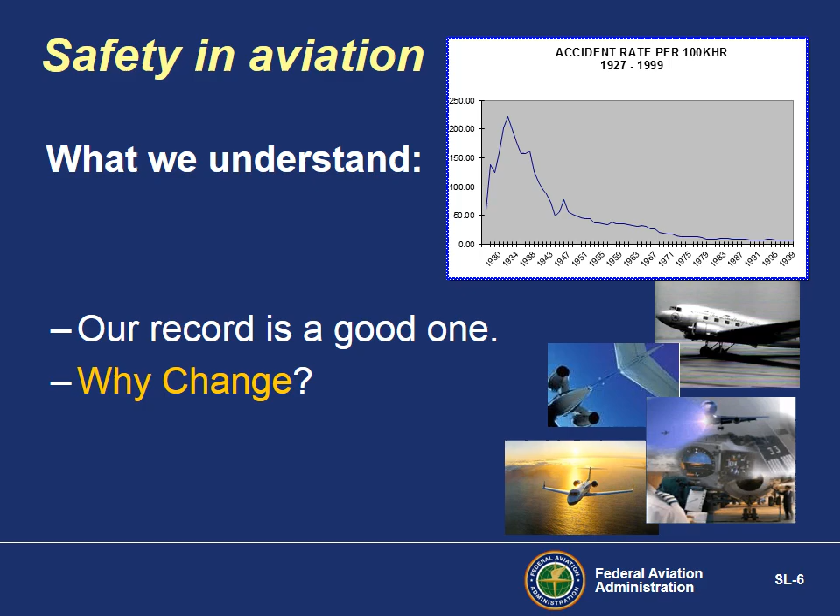This concept was presented to the FAA's managers meeting in August 2009 by Malcolm Sparrow, professor of public management, Harvard Kennedy School of Government, and a frequently quoted expert in risk management.

Inspectors in the aviation industry's safety focus has been driven by the question: is it legal or is it illegal? This is regulation-based thinking. But simply looking to enforce minimum regulations does not answer the question, does it cause harm? This change in focus is the basis of SMS thinking.

Another thing to point out is that regulations are made for everybody and for hazards that affect everybody. But there are harms that may be significant for one or a small number of operators, but not for all. SMS fills in the gaps through a safety risk management process.

Now let's look at ICAO's definition of a safety management system. ICAO defines SMS as a systematic approach to managing safety. This refers to looking at systems and managing those systems. In other words, we don't want to look at just the pilot.

We also want to look at pilot training, pilot checking, pilot manuals, chief pilots, operations managers, fleet managers, the entire system that supports the pilot. This same principle is then applied to all sectors of the service provider's operations.

In summary, SMS is the application of business management practices to the management of safety.

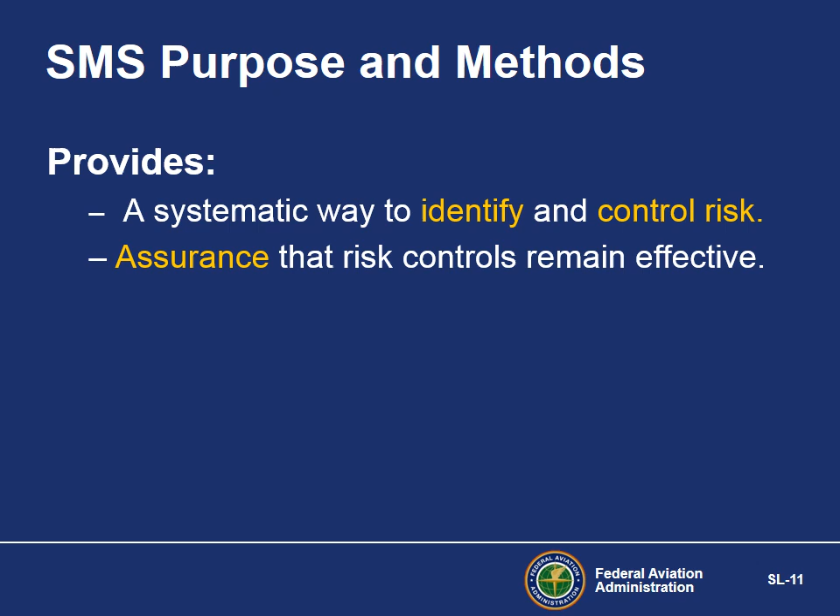We have a definition of SMS, but what does SMS do for us? SMS is a system-based approach that has as its core objective to identify and control risk. It allows us to have greater confidence, assurance that risk is under control. The service provider institutes the controls, and the oversight authority verifies the controls are effective.

It provides a uniform, formal method to comply with the rules, and it provides a method to evaluate an organization's safety management capability. As pointed out earlier with Dr. Sparrow's diagram, the SMS also helps control the effects of hazards that are beyond current regulations.

System safety concepts have not changed, but have been incorporated into SMS. The first bullet shows a general description of system safety from which our oversight processes have evolved. The second bullet is traditionally where system safety efforts have been focused.

An example of technical application might be the review and approval of a certificate holder's RVSM. Three inspector technical specialties are required to be involved in that approval process. Systems thinking would additionally consider the interfaces between the technical experts, as well as the interfaces between the organization's procedures, manuals, workforce, etc.

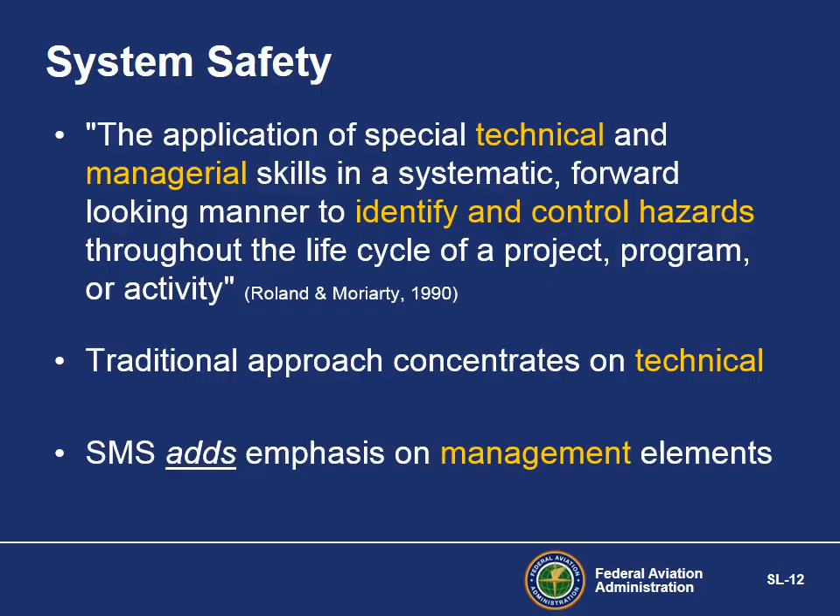ICAO is a United Nations organization that issues international standards related to civil aviation. The FAA is not pursuing SMS because of the ICAO standards. The FAA is moving toward SMS because it is the right thing to do.

Now, there was a lot of energy around the deadline for member states to be compliant with Annex 6 and what that means for the U.S. aviation industry. It's important to remember that the ICAO requirement applies to member states, not individual service providers.

This is an extract of the key text. Notice the golden words. There are two requirements for the FAA in the ICAO standard. First, we need to develop an SMS rule. Second, we need a method to evaluate a service provider's SMS.

The U.S. has filed a difference with ICAO. It's not an exemption or a get-out-of-jail-free card. It merely states that we do not comply with the ICAO standard now, but we intend to.

Each ICAO member state must decide individually whether to allow us into their airspace while we are in non-compliance. Currently, the FAA has no procedure to approve or accept a service provider's SMS. That will come along with the issuance of a rule.

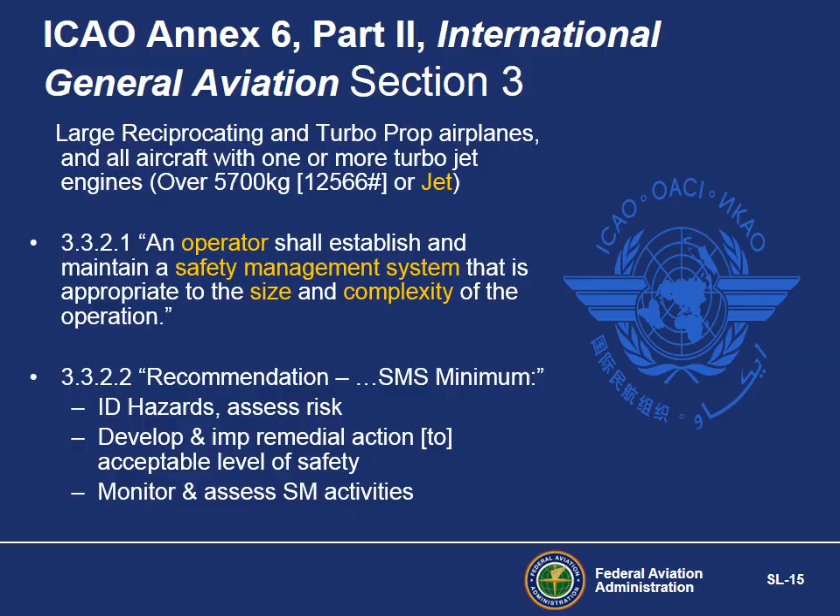Now let's look at the big picture view of SMS as it pertains to ICAO and the FAA. We've been talking about ICAO's Annex 6, which is the ICAO standard requiring a state safety program and service providers' safety management system. So now that we know what is required, we turn to ICAO Document 9859, the Safety Management Manual, which contains the procedures for implementing a state program and the service provider's safety management system.

Within aviation safety, there are two forms of SMS. The first SMS, which is our state safety program, is for our own AVS lines of business. This applies SMS to the FAA's own internal processes and is known as the AVS SMS or the internal SMS.

There are several lines of business, for example, flight standards, AIR, aeromedical, ATO, etc. Each line of business will be implementing the AVS SMS in their own area of responsibility. Two orders provide the policies and procedures for the AVS SMS.

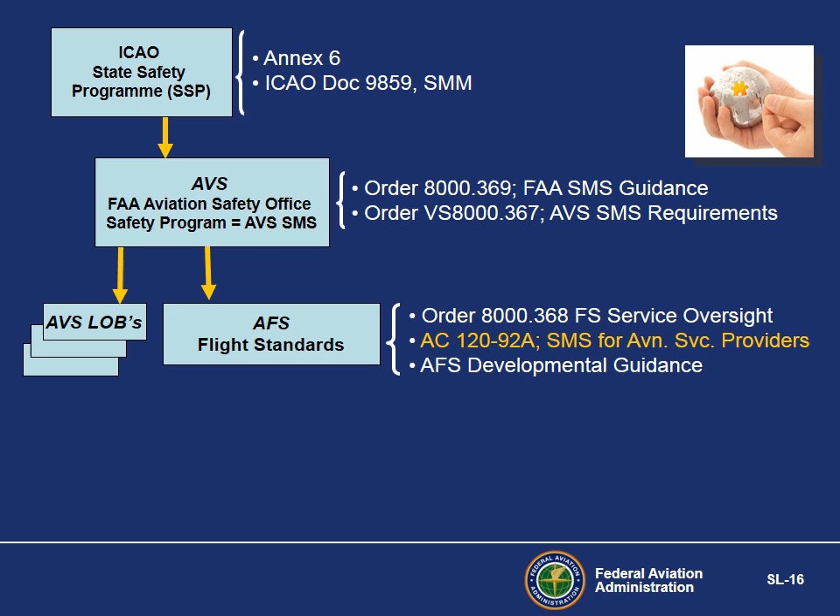The second SMS, the right-hand arrow, is the one we apply to our service providers in the form of an SMS rule and is called the external SMS. It is part of flight standards and is managed by the SMS Program Office, AFS 900. There's an order, advisory circular, and other developmental guidance available that we'll talk about more later.

Finally, there is the service provider's SMS. The service provider's SMS manages their own risks and monitors their own risk controls.

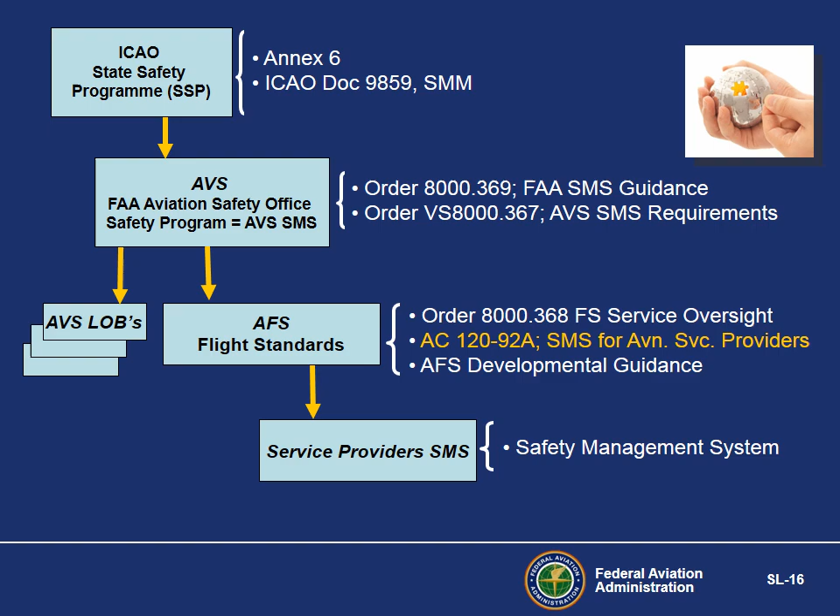Let's examine the roles, responsibilities, and relationships between the FAA and our service providers. Each service provider has operational processes that are used to provide services to their customers. The FAA has oversight processes that we use to accomplish oversight. Currently, we use the NPG and ATOS. In the future, we will use the Safety Assurance System, SAS, which will include our own internal SMS processes.

Traditionally, the FAA accomplished oversight by way of numerous direct inspections of the service provider's operational processes. In short, we have provided the service provider with safety assurance, or we're more like quality control of their operational processes, not really an oversight job. With an SMS, the service provider or operator will increase their role and responsibility for safety assurance by managing their own risk and monitoring their own risk controls through their own SMS.

So what happens to our traditional oversight? Under SMS, the FAA provides oversight of the operator's SMS to assure ourselves and the traveling public that the operators are managing their own risk and monitoring their own controls. We will still do direct inspections of the operational processes. Remember the trust but verify axiom, just not as much as under traditional methods.

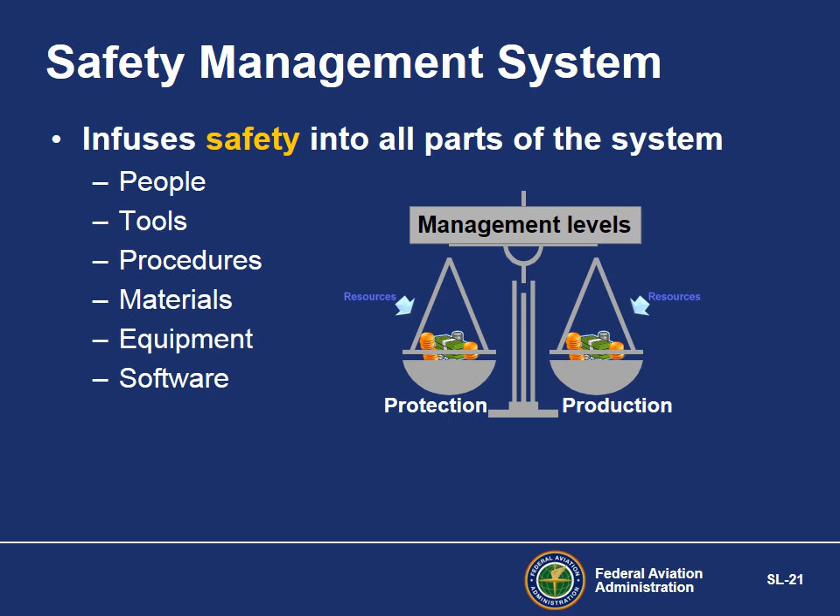Safety issues are the byproduct of activities related to production and service delivery. They are always there. An analysis of an organization's resources and goals allows for a balanced and realistic allocation of resources between protection and production goals, which supports the needs of the organization.

The normal course of delivering production creates safety issues that need to be managed. An organization's leadership must balance production and protection with the same skill as they balance credits and debits and employee staffing.

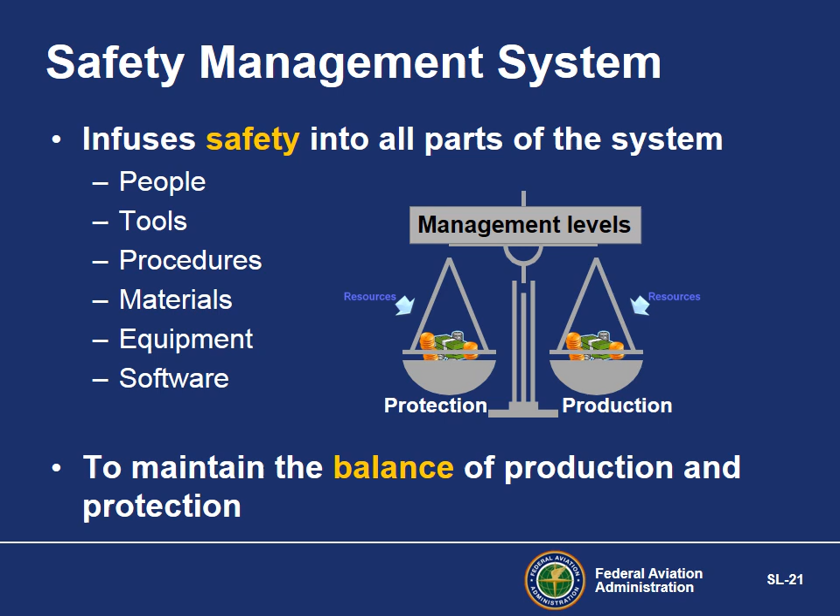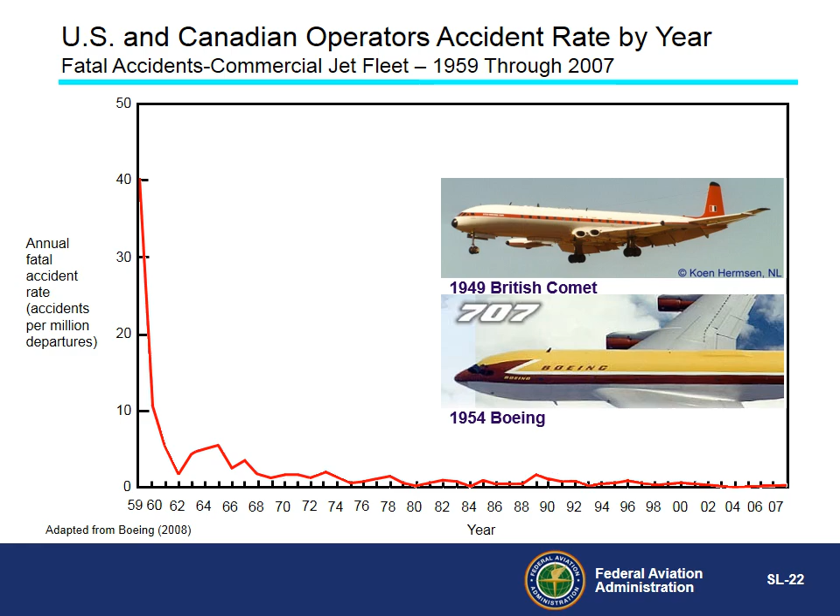Over the last 50 years, there have been paradigm shifts in the evolution of safety thinking, and the accident rate has steadily improved as a result.

The first shift was technical factors. In the 1950s, accident investigations focused primarily on equipment failures. As aviation technology improved, better, more reliable equipment reduced the number of equipment-related accidents. Think of how much better our jet engines, avionics, and navigation aids have become.

With further technological advances, aircraft systems became more reliable and pilots took on a system monitoring role. The downside was, as aviation became more technologically complex, the opportunity for humans to make a mistake increased.

Shift number two involved human factors. At the same time that their complexity was increasing, new systems were becoming more reliable and fault-tolerant and included warnings and annunciators. As a result, the focus of accident causation shifted from mechanical equipment failures to human factors. As this period progressed, there was a greater realization and emphasis placed on reducing and controlling human error.

The current paradigm shift focuses on organizational factors. Over time, through observation and the study of human factors, some in the aviation community began to consider whether there were underlying factors that put pilots and other aviation personnel at risk for making errors. The chief focus became how well does the organization support the employee?

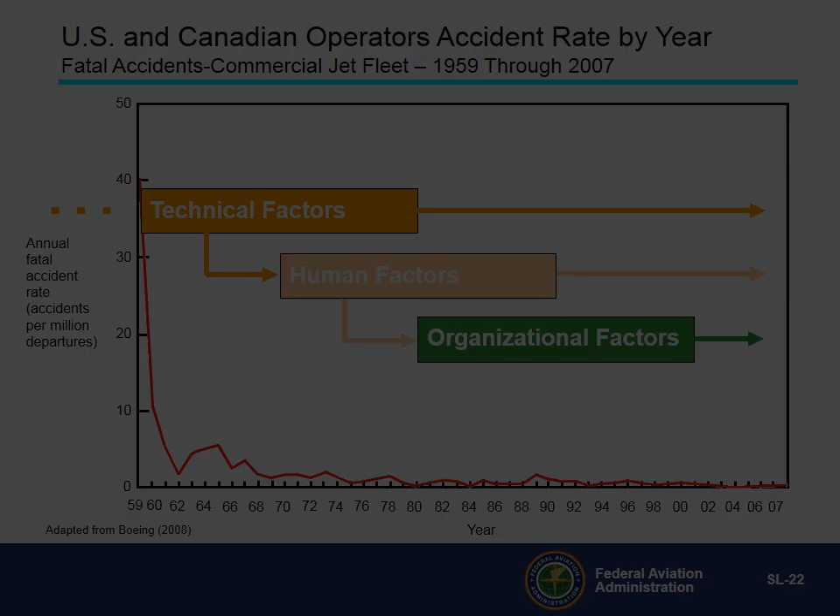Safety culture permeates an organization. It runs across all SMS components and must be considered in the discussion of any SMS. But less is said about how these concepts relate to things we can observe, test, or manage.

For example, what laws and regulations must we comply with? What are the industry standards and norms? And how do business and market relationships affect our systems? The equipment, tools, facilities, policies, procedures, and training also shape the environment in which frontline employees work.

The psychological element is arguably one of the most deeply rooted elements because it contains the human thought and decision-making processes. It is one of the hardest to affect through direct action.